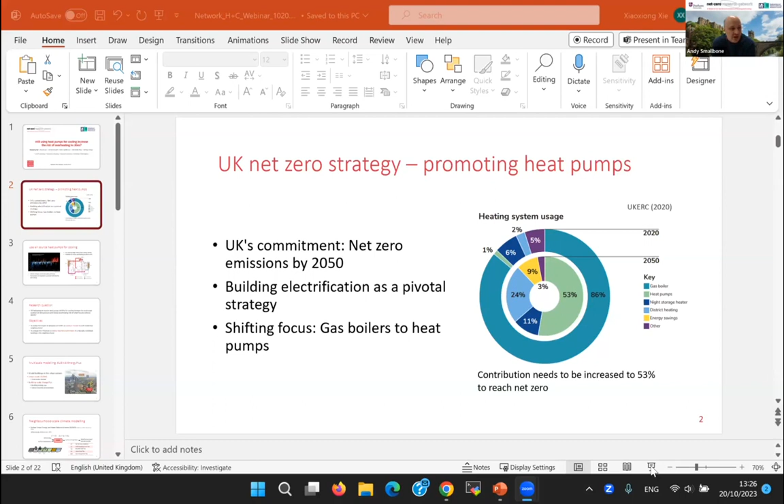We're going to move straight over to hearing from Xiaoxiong Xie from the University of Cardiff, who will present on the project Increasing Urban Overheating Risk from Cooling Decarbonisation by Heat Pumps. Dr. Xie is a research associate at the Welsh School of Architecture, specialising in the link between outdoor and indoor environments. He has expertise in city and building scale modelling, and his research focuses on investigating the impact of global warming and local climate on urban occupants. He is going to introduce this project, which explores the potential impacts of adopting air source heat pumps for cooling purposes on the local climate.

So yes, our project is about looking at another part of heat pumps. It's for cooling, because currently UK homes are heating dominant, but as we have experienced several hot summers in recent years, we start to think about the future. Maybe in the future the weather is getting hotter, and heat pumps will be more used for cooling purposes. In this case, what will be the influence of heat pumps for cooling on the urban climate? Will it increase the overheating risk of cities? That's the question we are going to address in this project.

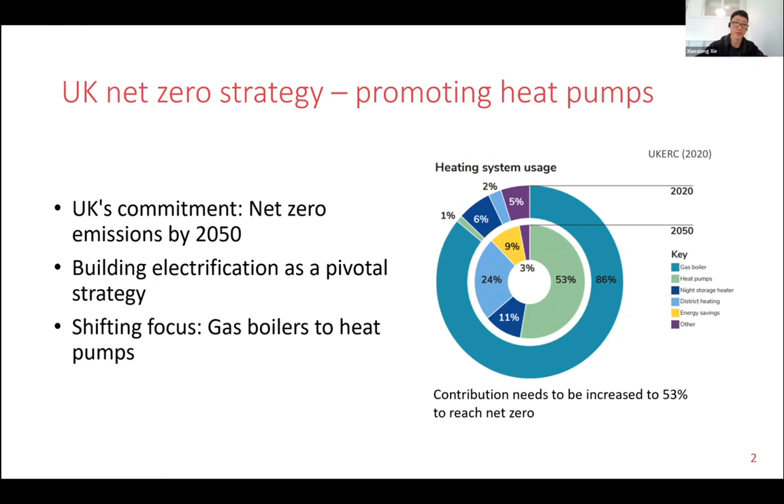Andrew has mentioned lots of the context of heat pumps in the UK, so I'll just briefly introduce it. The UK is setting a goal to achieve net zero emissions by 2050, and it requires lots of transformative changes in different sectors, such as buildings. For UK homes, space heating consumes the most energy, about 60%, and currently mostly relies on gas boilers, which consume natural gas. To achieve net zero by 2050, there's a need to reduce dependence on traditional heating devices such as gas boilers. The central strategy is to shift from gas boilers to heat pumps, for example from 1% currently to 53% in 2050.

As I just mentioned, the UK has a traditionally mild climate, so homes have dominant heating needs. But with climate change, the cooling demands of UK homes can increase in the future, and heat pumps are expected to play a dual role in both cooling and heating. When operated in cooling mode, air source heat pumps release heat because they remove heat from indoors to outdoors. This could be a problem, especially for dense urban areas with intense usage of heat pumps, because it may increase urban temperature.

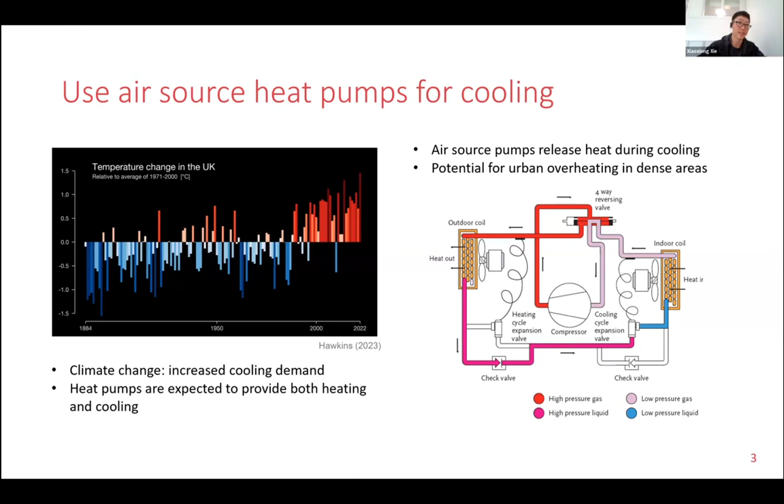So this addressed the research question: will adopting air source heat pumps for cooling increase the local scale outdoor air temperature, and also the indoor overheating risk of other buildings in the neighborhood without air source heat pumps? Our objectives are assessing the impact of adopting air source heat pumps, firstly on the outdoor climate, and secondly on the indoor environment of naturally ventilated buildings.

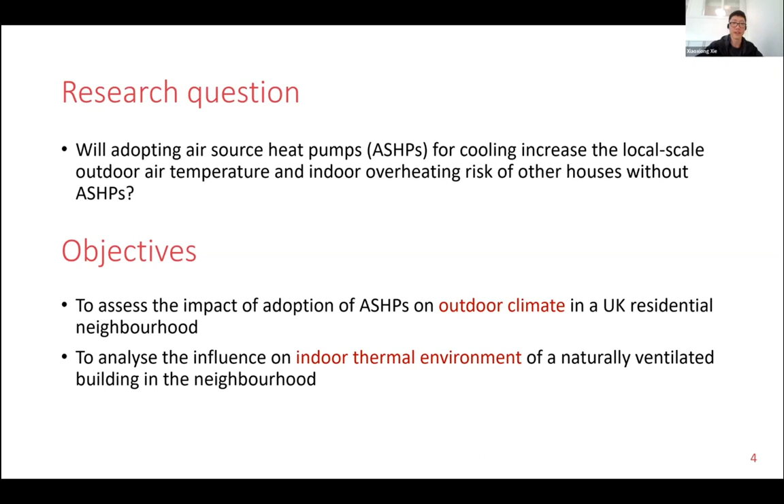To assess this, we are looking at the building in the urban context, which is influenced by different factors, such as different radiations, heat storage, emissions in the urban context, overshadowing from surrounding buildings, the wind sheltering effect, and vegetation in the urban environment. So we need a multi-scale modeling scheme to consider these effects on buildings. We combine SUEWS and E+. SUEWS is a local scale land surface model, so it can model the local scale climate, and E+ is the building scale model, basically a building energy simulation tool used to simulate building energy use.

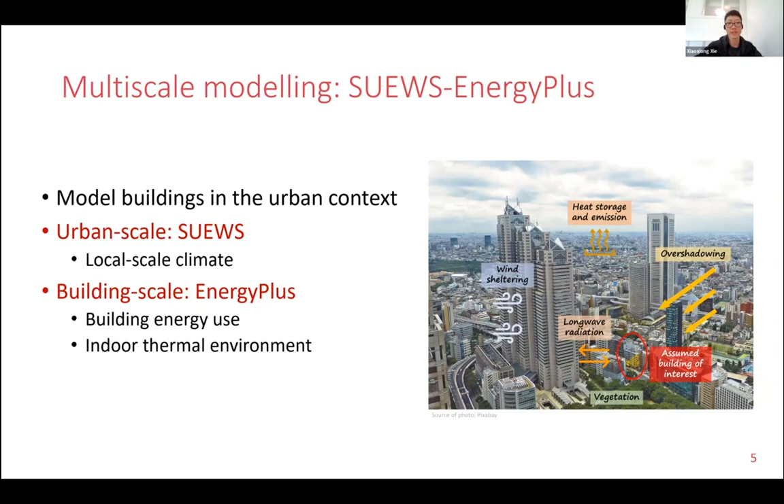It can be used to assess the indoor thermal environment. So SUEWS has been well evaluated in different climates globally, and it's based on this urban energy balance equation. So basically, SUEWS just needs some commonly available meteorological data and some surface characteristics, like the land cover information, the albedo of the surface, something like that. And to simulate the surface energy fluxes, it uses the equation, and then derives the wind, temperature, and humidity profiles

in the neighborhood. And in SUEWS, the anthropogenic heat emission from buildings is calculated with this equation. So here rho pop is the population density, and AF0 is a coefficient representing the non-temperature dependent QF. And AF1 is one related to the cooling degrees. So it's a coefficient representing the dependence of the QF emissions based on the cooling. And also AF2 is one based on the heating. And these coefficients can be derived by different approaches.

And so basically, they follow a shape of either U or V. So for example, in Shanghai, there's a U shape, and we can see that. So it's the relationship between the anthropogenic heat and the air temperature, and when the temperature is becoming higher, the use of energy for cooling is increased. So the heat emission is becoming larger. But for the London case, because currently London has a very mild climate, there's basically no cooling need. So there's only heating need, which is the left part of this curve, and the right part is becoming flat because as the temperature increases, the use of energy is not increased significantly.

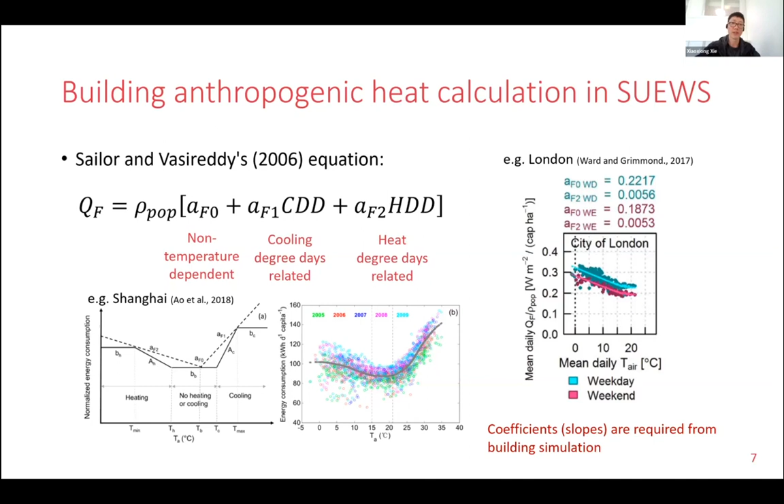And so basically, these charts can be obtained by different approaches, such as top-down approaches, which use the city scale energy use information, or the bottom-up approach, which uses building energy simulation to calculate the anthropogenic heat emission from buildings. Because in our case we are going to look at future London scenarios, we are going to use the bottom-up approach, using building energy simulation to obtain the QF. We are going to use EnergyPlus, one of the most widely used building energy simulation tools, and it's well evaluated, and it's open source so that it can be combined with other models at different scales,

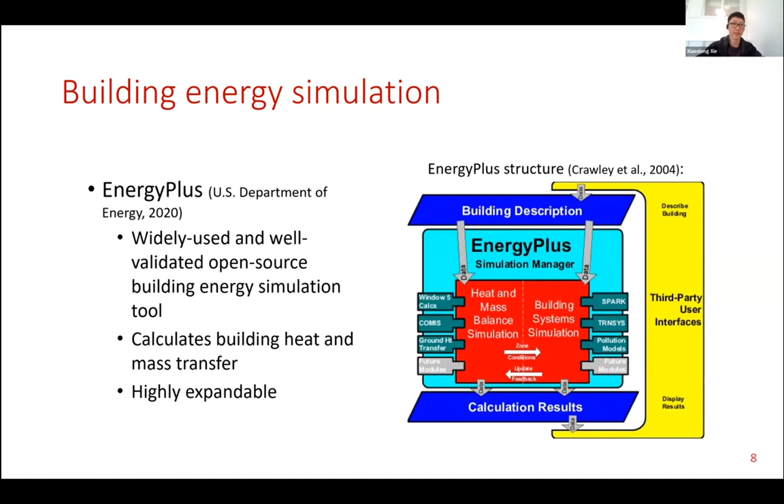such as SUEWS. And the workflow of our multi-scale modeling scheme is that firstly we use EnergyPlus to simulate the building energy use to obtain the daily relationship between the QF and the outdoor air temperature, just like the figures I just showed. And we can derive coefficients from this relationship that can be used in SUEWS to model the local scale climate, accounting for the impact of different cooling and heating systems, such as gas boilers and heat pumps. And in another case, this local scale climate data can be used to drive EnergyPlus again to simulate the indoor thermal environment of buildings that don't use air source heat pumps.

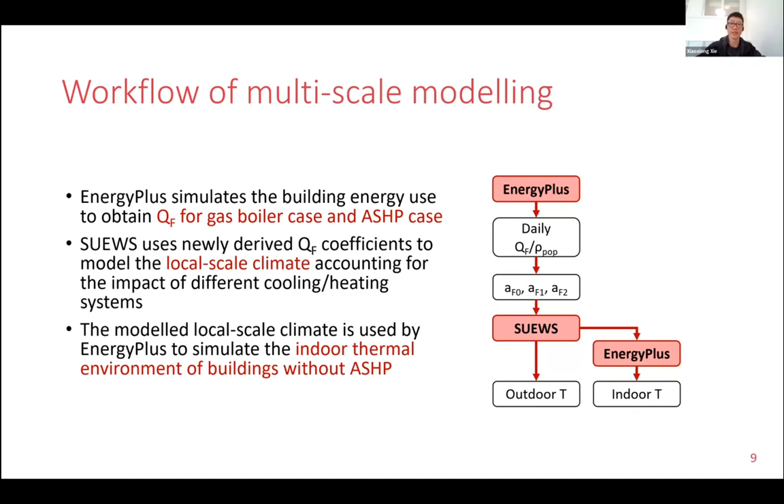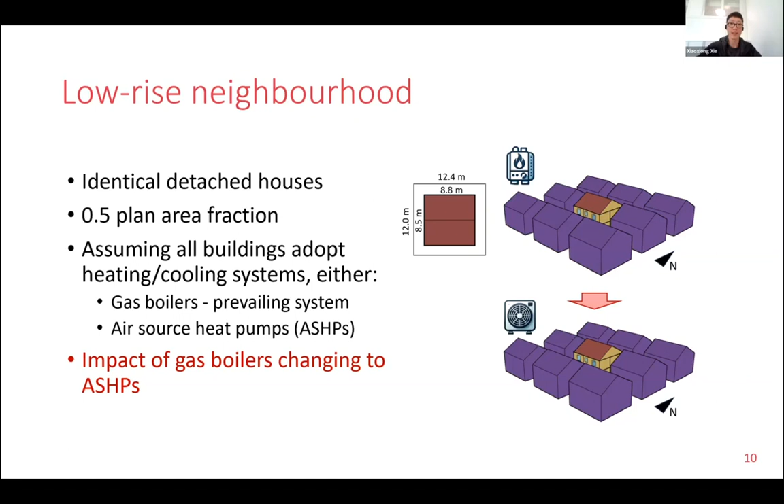And so we are looking at a low-rise neighborhood. It's an idealized residential neighborhood, and it consists of identical detached houses with a plan area fraction of 0.5. So we assume that in one case, all of the buildings in the neighborhood are installed with gas boilers, which is the prevailing system. And in the second case, they're all changed to air source heat pumps. So we are going to look at the impact of this change on the outdoor and indoor thermal environment.

And for the building archetype, we are going to look at the UK detached house. It's assumed to have an insulated cavity wall because we are looking at the future case. So it's a well-insulated building with a U value of 0.5 for external walls. And because elderly people are at higher risk of overheating, we are looking at an elderly couple occupancy, who are at home throughout the day. And for the two systems, firstly, for the gas boiler, we assume 80% efficiency. And for the heat pumps, we assume that the COP changes with outdoor air temperature, and we use the data from CIBSE AM16.

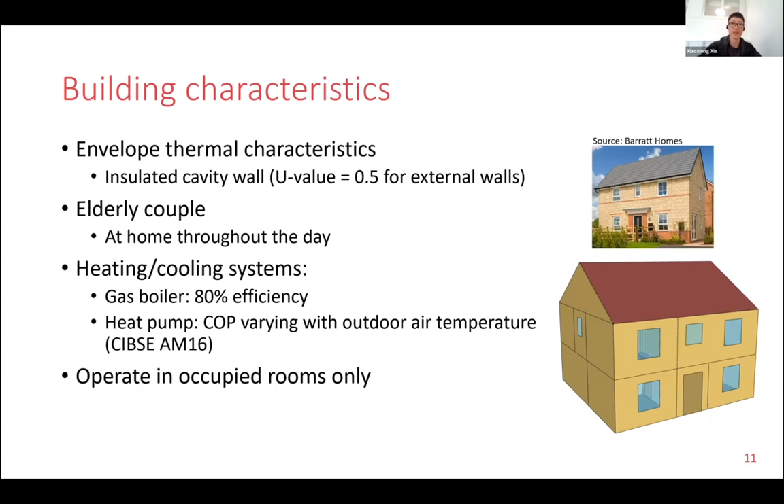And for the operating modes, we assume that these systems are only used for occupied rooms. I think it's more realistic because people are trying to save energy at their homes. So we take this as the base case. And for the weather data, we use the UKCP09 design summer year data.

So the DSY data basically assume a relatively warm summer, but not at the extreme. And we are looking at the London 2050s data and two emission scenarios: the medium emissions, which is the base case, representing the balanced use of energy between renewable and non-renewable sources, and the high emission scenario, which refers to intense fossil fuel use.

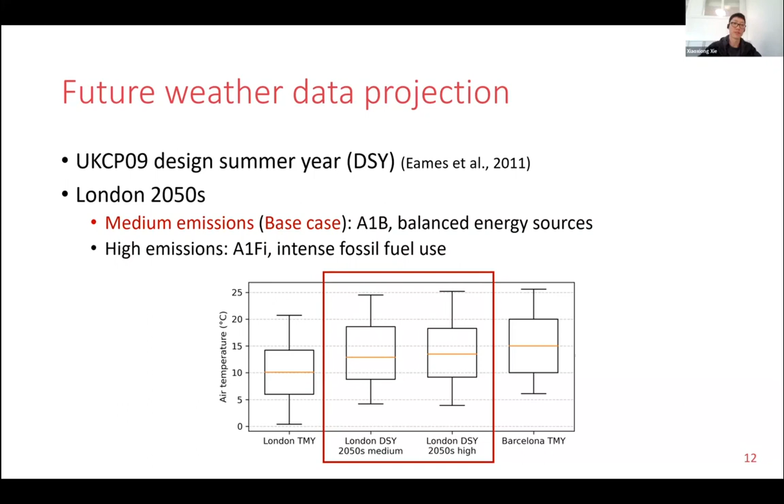So firstly, we use EnergyPlus to run the simulation to obtain the relationship between the QF and the outdoor air temperature, because we are going to derive these three coefficients. So we need the relationship between QF divided by rho pop and the outdoor air temperature. In this plot, each dot shows the daily mean value of QF over rho pop, corresponding to a certain mean outdoor air temperature. And we run the simulation for the whole year so that we can obtain the fitted line from this data.

So basically, these lines show the balance points. For example, the gas boiler only provides heating, so only during days with relatively cool temperatures is there increased energy use, and when the temperature increases, this line becomes flat. The dashed line here represents the temperature where the transition occurs. It's the base temperature used to calculate the cooling degree days and heating degree days.

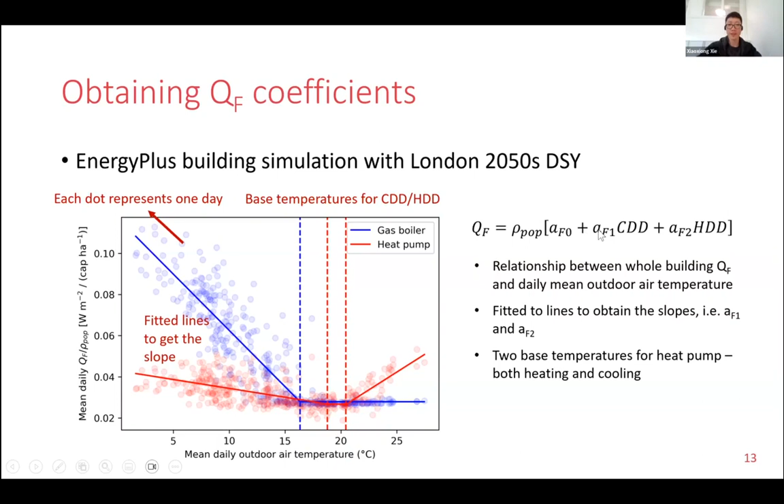And for the heat pump, there are both cooling and heating modes, so there are two balance points, and the slopes of these lines are the coefficients that could be used in the SUEWS simulation. So after obtaining these coefficients, we run the SUEWS simulation for the hottest day in the 2050s.

This is the diurnal change of the outdoor air temperature on that day. And we can find that the maximum temperature is just 31 degrees. So it's not a very high value, because in the past few years we've experienced around 40 degrees in the UK, which is pretty hot. But this is not at that extreme.

So first, here is the difference in anthropogenic heat: the heat pump minus the gas boiler. Because on this hot day, only heat pumps provide cooling and the gas boiler is not running, it's the difference in anthropogenic heat emission due to using the heat pumps. We can find that the peak value occurs at midday, about 6.3 watts per meter square. And the corresponding increase in the air temperature is around 0.03 degrees.

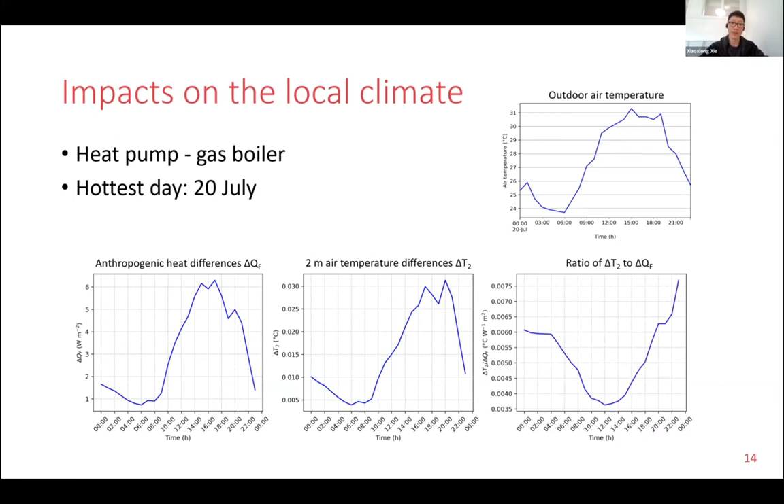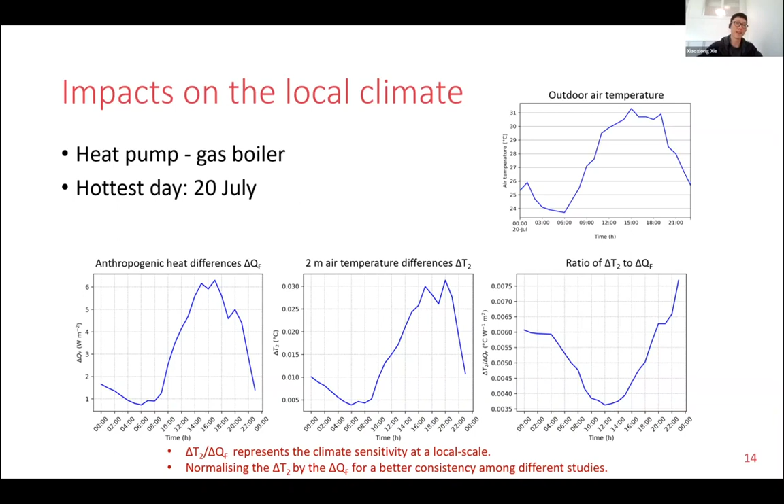And we are also looking at the ratio of delta T2 to delta QF, because this value is more important as it represents climate sensitivity at the local scale. By normalizing delta T2 by delta QF, we get better consistency to compare with other studies. So for this sensitivity of temperature to QF, this diurnal change is as expected, because it's related to the boundary layer depth of the urban climate.

Basically, during the daytime, we have solar radiation on the urban surface, so the surface becomes warmer, and the air close to the surface is also warmer than that in the upper atmosphere. Due to buoyancy, the warmer air near the surface moves upward, which makes the atmosphere unstable. So there is greater vertical mixing, which makes the urban boundary layer deeper. So the sensible heat available from the surface is spread over a larger vertical extent, and the temperature increase is less sensitive to the QF.

But at night, when there's no solar radiation, the surface is usually cooler than the air, which makes the bottom part of the air cool, so the atmosphere in the urban environment is more stable. In this case, the boundary layer depth will be shallow, so when energy is released from buildings into this shallow urban boundary layer, the total volume of air is relatively small compared with the daytime.

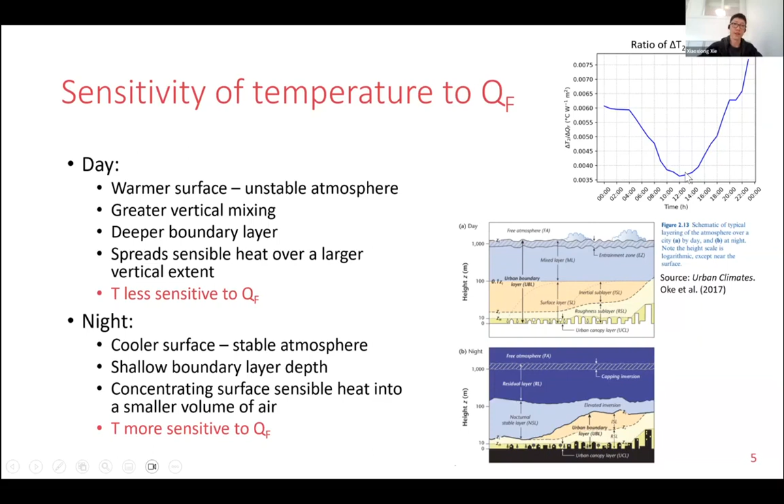So the increase in available energy will lead to a larger increase in air temperature. In this case, the air temperature is more sensitive to the QF, which explains this diurnal change of the ratio of delta T to delta QF.

And also we compared our result to some other studies, and we can find that although our temperature increase due to the increase in the anthropogenic heat is very low, this ratio of delta T to delta QF is similar. But we are looking at some other cities like Hong Kong. There's very intense use of air conditioning, and there are compact high-rise buildings. So there's very large emission of anthropogenic heat, which can be up to 300 watts per square meter.

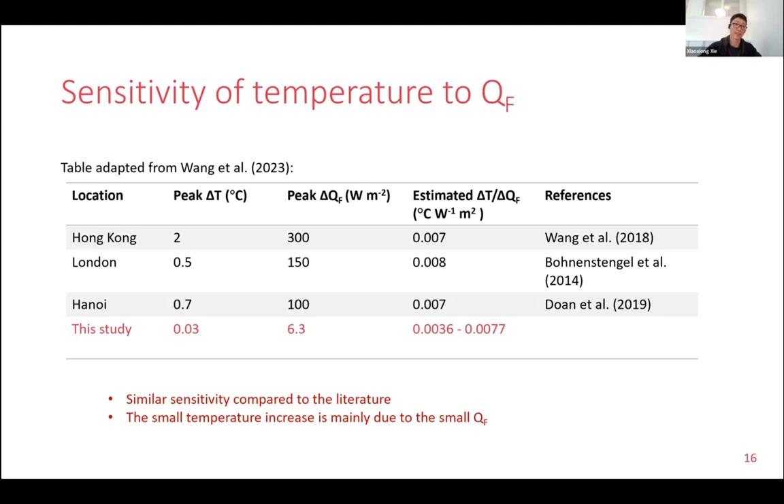But in our case, because we are just looking at the low-rise neighborhood with only two people in each house, the increase in the anthropogenic heat emission is pretty low. It's just around 6, so we have a relatively small increase in the temperature. But the similar sensitivity suggests that our results are reliable, and basically the small temperature increase is mainly due to the small QF.

And we further look at the impact of the adoption of heat pumps in the neighborhood on buildings without heat pumps. So we assume that all other buildings in the neighborhood have heat pumps for cooling, and there's just one building which uses natural ventilation for cooling. So the outdoor air temperature is increased due to the adoption of air source heat pumps in other buildings, and that will also influence the indoor thermal environment of this building.

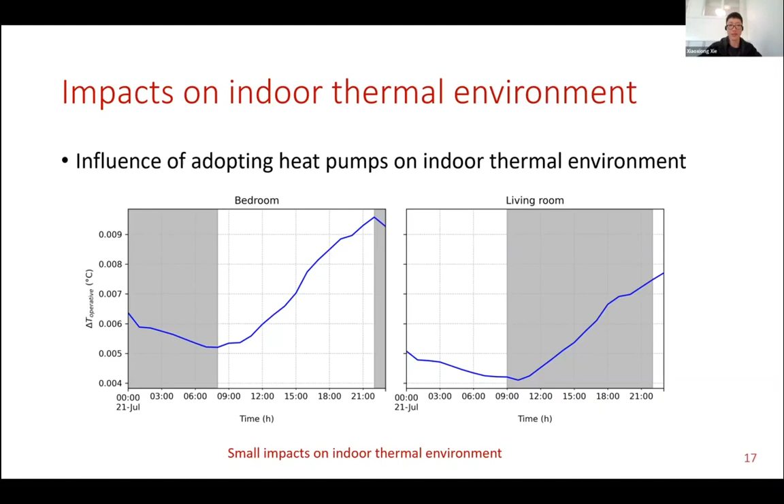This result shows the indoor operative temperature in these two mainly occupied rooms. The shaded area shows that the room is occupied, and the result shows that the increase in the operative temperature is actually low. It's up to 0.01 degree, so this suggests that the impact of adopting air source heat pumps for cooling in other buildings is very small for this naturally ventilated building.

And also we are looking at different scenarios of heat pump operation, because in many studies, it's assumed that the air conditioners or the air source heat pumps are operating for the whole building instead of the single room that is occupied. So this could over-predict the total anthropogenic heat emission. So we compare these two cases to understand how this can influence the results.

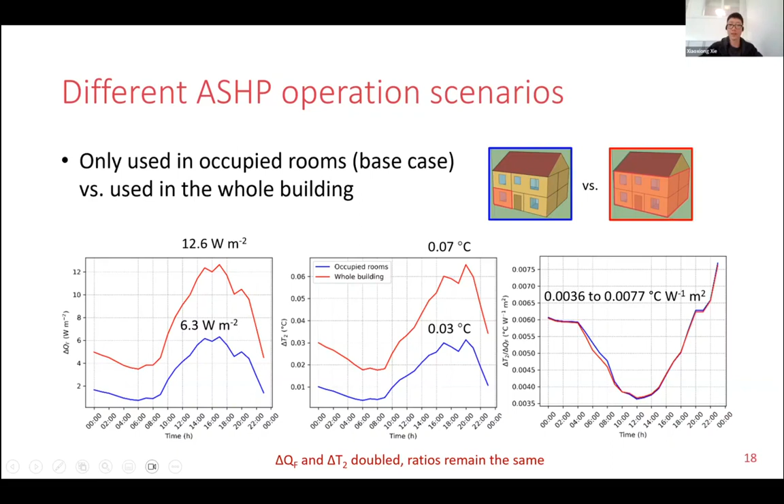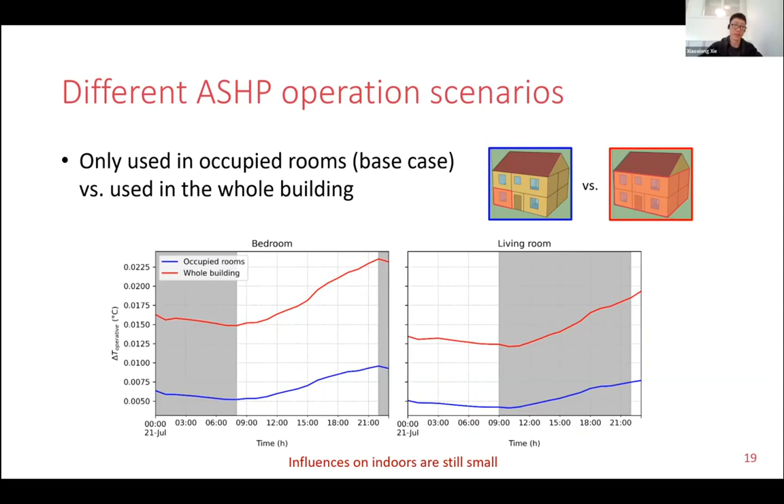The blue line is our base case, and the red line is the one with heat pumps operating for the whole building. And we can find that the delta QF is almost doubled, and the delta T is also almost doubled. And the ratio in both cases basically remains the same. For the indoor impacts, the indoor operative temperature difference is increased to 0.02 degree, but it's still very small, and basically it's not sensible to occupants in terms of thermal sensation.

And we further look at the 2050s emission scenarios for high emissions, and this shows the difference in the outdoor air temperature. We are picking the hottest day from each emission scenario, and for the high emission scenario, the peak temperature on the hottest day is around 1 to 2 degrees warmer than the medium emissions. It's not very large. So as a result, we got a delta QF increase of just 0.5 watts per square meter, and some limited increase in the air temperature, and the shape and magnitude of the sensitivity of T2 to QF remains similar. So the difference between these two scenarios is still pretty small.

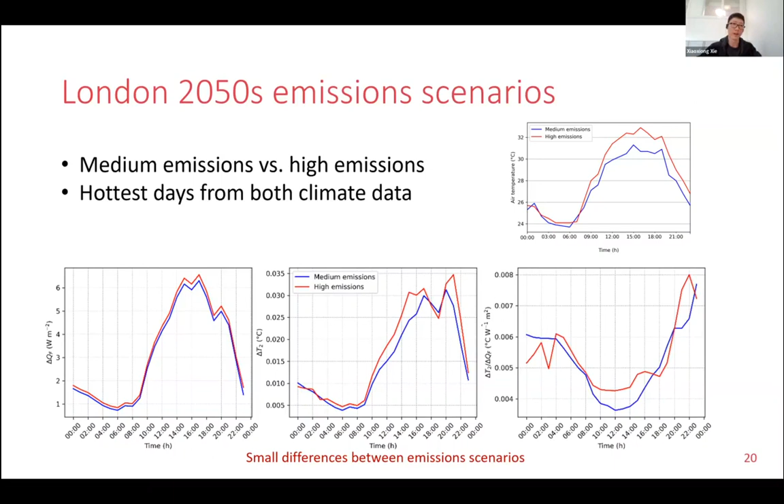In conclusion, we found that in UK low-rise residential areas, adopting heat pumps may result in very small effects on the local climate and on the indoor thermal environment of buildings without heat pumps. But we are looking at the case with low-rise buildings, so the impact of heat pumps could be potentially larger in areas with more intense usage. For example, central London has compact high-rise urban areas, so the temperature increase could be potentially larger.

And another case is at smaller scales: for example, if we look at a single outdoor unit placed very close to another building, the influence on the other building could be potentially larger. So these are some future directions we can look at.